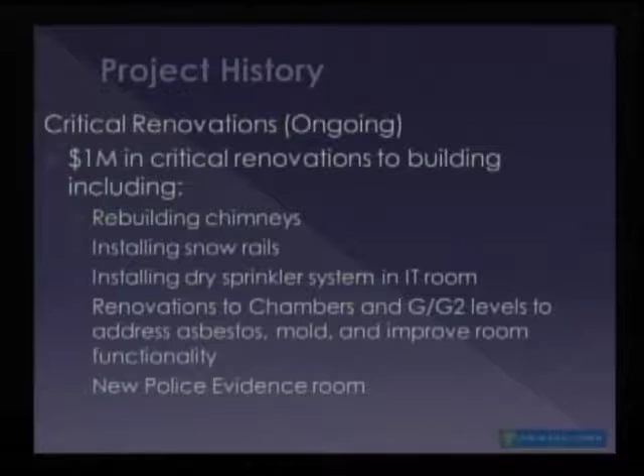We then went into a procurement process to bring an architect on to work on the schematic design, which is what we're reporting on this evening. After an extensive procurement process where we got a lot of great responses, we brought on 2 architectural firms that are doing our large projects for the city.

After they were under contract and approved by City Council, we then asked them specifically to propose how would you address and approach the City Hall Public Space and Safety Improvements Project. Through that process, council awarded to Studio 27, and that was with the full consensus of the City Hall Task Force.

Most of you have heard this presentation before or have had interaction with Studio 27, but I'll just note for you all, they have done business in the city before as they did the design for the Easter Seals building just off of Hillwood.

We have decided that the construction methodology for this project will be called CMAR, which is a construction manager at risk process, and it's a way to mitigate the risk for the city and control costs. What it allows us to do is, per state code, bring on the contractor during the next design stage, and then they would be with us all the way through design to construction, teaming with the architect, so we're all clearly on the same page as we move forward to design and construction.

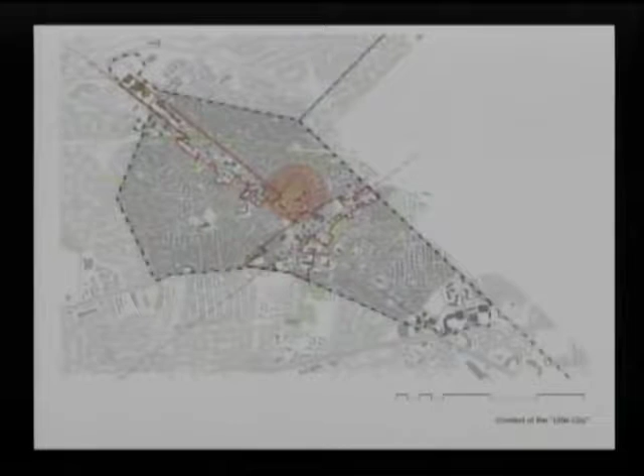So what I'm going to show here is a couple of slides, and the way that we began to study the building. This first slide is drawing the city and then also drawing the building to see what their relationships are, and how it exists right in the center of the town and how meaningful that is to make center.

Then we started zooming in a little bit more, and these are two diagrams that illustrate how the City Hall is really a building in the park. You can see Cherry Hill Park off to the left, and if you understand these topo lines, basically how the ridge rises up, City Hall sits there, and then rests gently against the park.

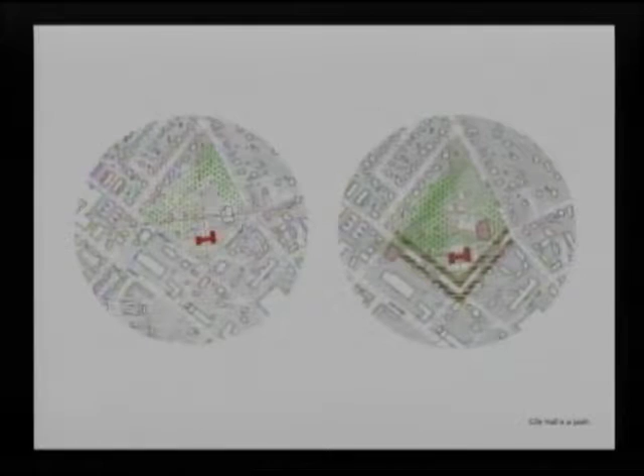When we first got involved was about right here. These are some diagrams that we created, but we were really analyzing exactly where things are. The one on the left-hand side, you can see City Hall in the very front, and then off to the right is the community center.

There's an axis that actually begins to be formed between the intersection at the library and the rec center. It's interesting the way it begins to cross the landscape and connect the whole urban campus, this municipal campus that's formed.

Then we look to the one on the right, and that's the concept that we actually received with Report 4. Report 4 was done by Dewberry, and they had, as Cindy was explaining, gone through so many gyrations of what this building could be, and ultimately this was imagined to be the right sizing of the building.

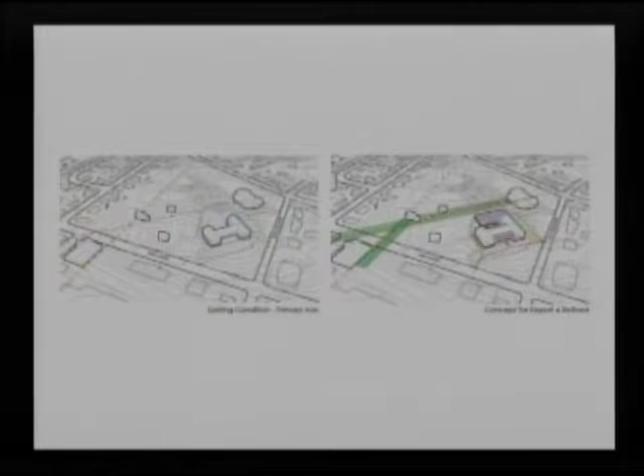That encompassed an addition at the front, we call the south building, or the south addition. We have the north addition at the rear, and then there was a parking garage. So those three elements become the primary elements that begin to be connected to the City Hall.

And then the next thing that we did was start drawing, as architects do. We actually found that there were no drawings of note that captured all of City Hall. So what we did was we collected from a whole range of different sets of drawings and documents that we could find.

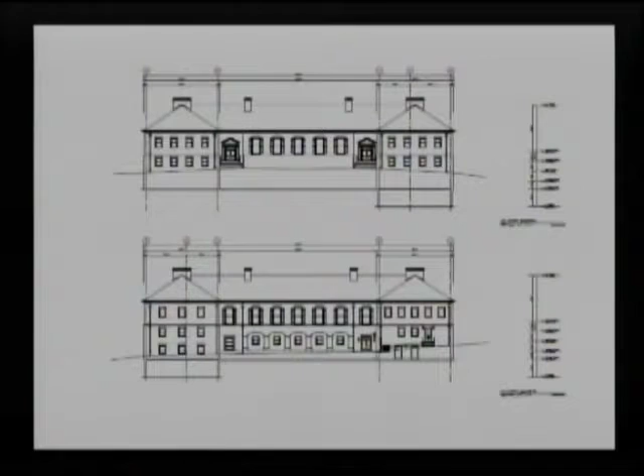And then you go through this process of drawing. That method actually begins to ingrain what this building is like, what it is, what it was, and what the original architects were thinking when they drew it. And so that process is very meditative, but it's also educational.

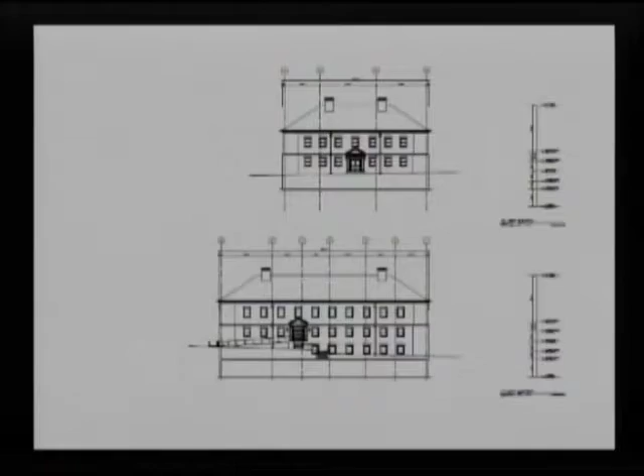And so as Jason was drawing through these and I was drawing through these, we were learning: what is the rhythm of the building? What is the scale of the building? And how does that begin to be reflected in what was realized?

But you can see how with the original building, the 1956, and then ultimately the 1980s addition, it was placed on the hillside very, very much with intention. It's also simple and balanced, humble in a lot of ways.

So we kind of joke about this. It's a studio because I'm educated at UVA, and it's like, when you start going and looking at a building, okay, well you got to draw a circle on it, like the rotunda. But really, this is a way that we began to understand the vocabulary of the building, the rhythm, the repetition that you find, the scales, all of this meaningful geometry that's embedded into a building.

And in a way, you're also going back and sort of reflecting through what the original architect thought about. So this is our next sort of way of imagining how this building was imagined and conceived.

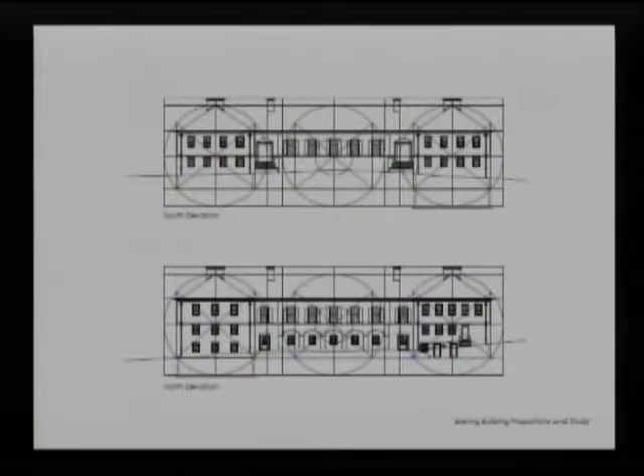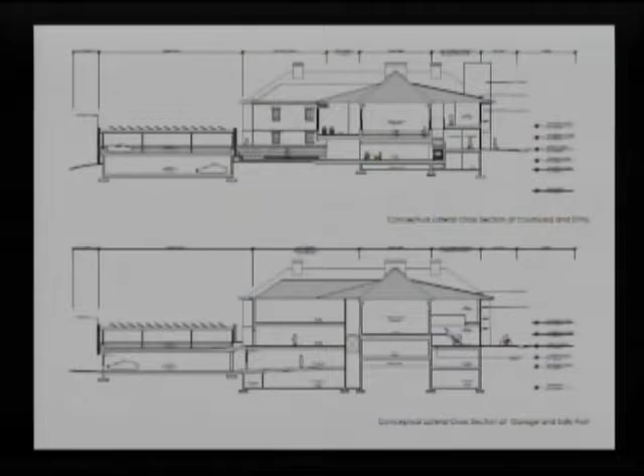So that's what this section begins to see: if we began to put X program on this part of the floor, what do we put on the next portion of the floor? And then we realized that there were a lot of common adjacencies, and if we began to interweave those together, the spaces open up and really have a very obvious relationship to one another.

A key component that we have in the building is wayfinding. Currently, when you come in, I would dare say, if you could guide someone to the bathroom on the first floor on the east wing, it's not going to happen. So one of the critical things that we were trying to figure out is what's going to lead most elegantly to a system of wayfinding in the building.

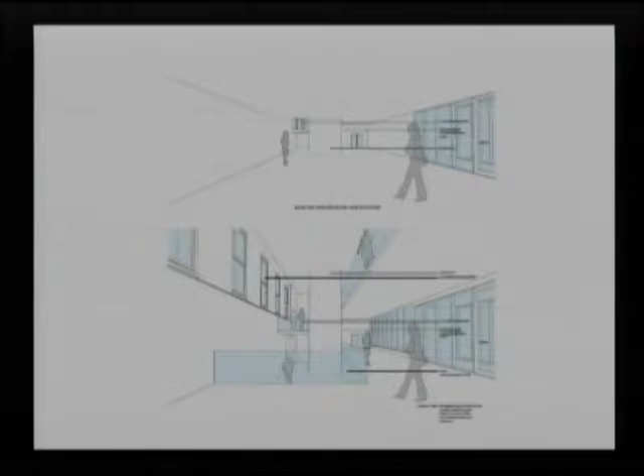So then we said, well, let's open up the floor just slightly so that we can make a visual connection from when you walk in the front door, off to the right here, to where the courts would be. You can see the windows of the existing courtrooms now sort of appearing if we cut away the floor. We said, let's take that a little bit further, let's take out the next level of the floor, the one going down. So now what you see is the main entrance on the right-hand side, and we could just add the small stairway here, and on the left-hand side, this is where the dogwood room is.

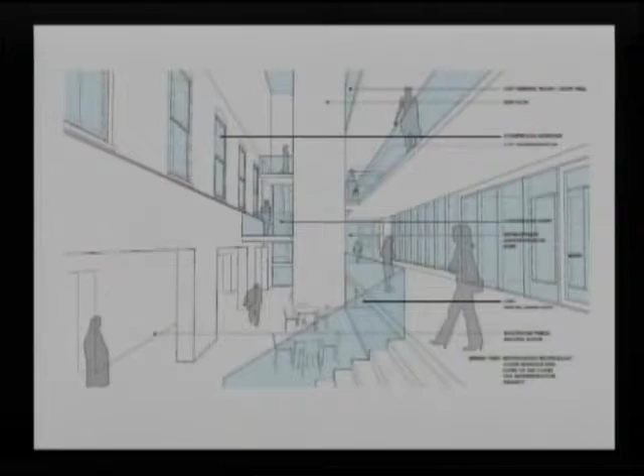Above that is the chambers where we sit now, and then off to the end begin the public exchange counters between the different program elements we have in City Hall. So we're going to reconfigure the wings, I'll show you a plan in a moment, so that the public functions would be immediately off of this new public entryway.

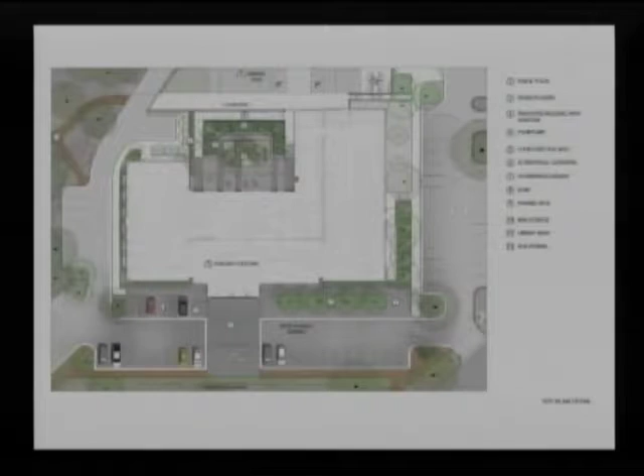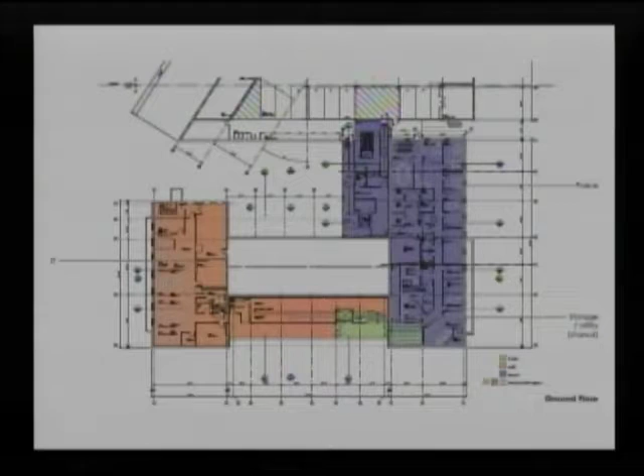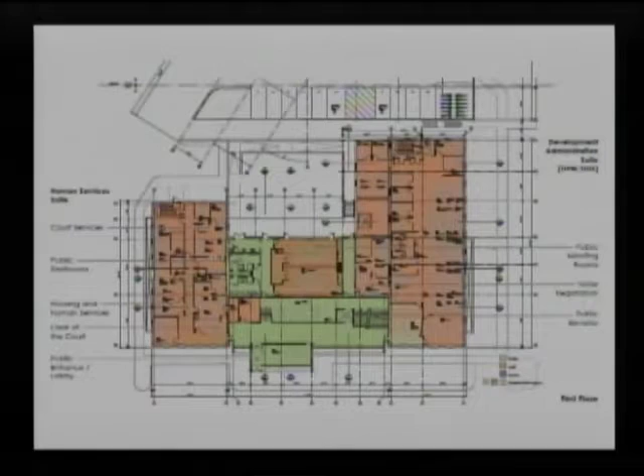So now we start, what does it begin to look like? We'll go back to my trusty UVA drawing and start looking at proportions, rhythms, and repetitions, trying to be very respectful of the original building.

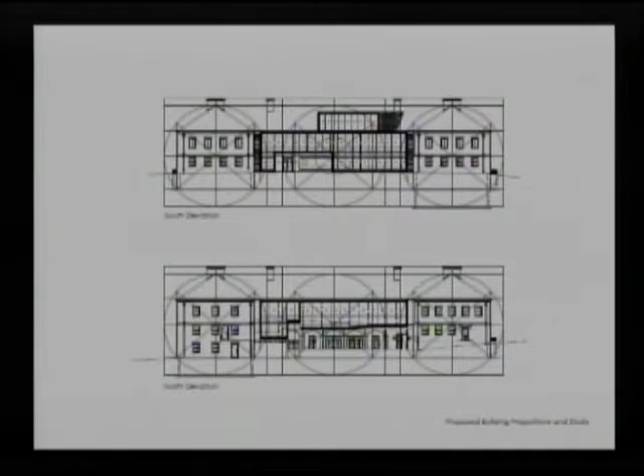What we have is we've created a glass box which is transparent so one can appreciate the original structure. In that glass box, it's also framed and very delicately touches the original building. We're trying to create a building that is transparent and has a delicate relationship to the existing structure.

This is a detailed study we've begun, with a lot more development to do, but basically the original structure, the red brick on the right-hand side, and its rhythm of windows, drip course, and eave line, are all translated into the framed and subtle divisions of all the glass of the new structure.

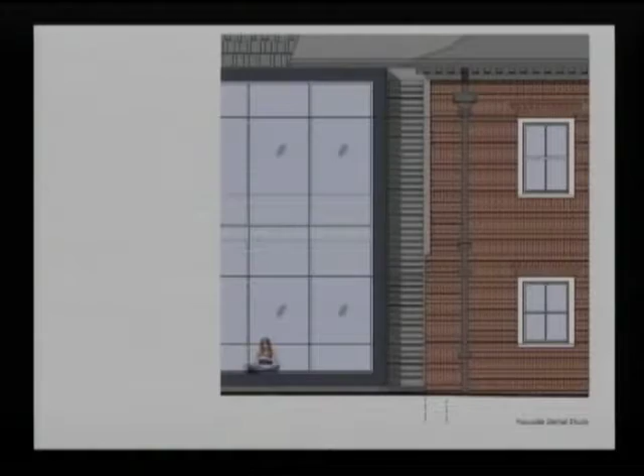So these are a couple of elevations. They're a little bit difficult to read, so I'm going to move through them.

This is a rendering we've been working on to try to study what it's going to look like. Since this rendering, we've now taken off this upper level floor, which was at one time a courtroom, and we'll see that in the video in a few moments.

On the left-hand side, we have the flags, and then the public crosswalk, a high textured crosswalk so that when you drive over it you're very conscious of it. You go into the main entrance, which you can bypass on the left-hand side, and that goes straight down the stairs through to the courtyard, through the lower level of the chambers.

To the right-hand side, we have a large atrium area with a new elevator, new stairs going up each floor, and public counters occurring at the end of each of these corridors.

This is another view looking into different kinds of materials, and we're going to continue these material studies through the design development phase. This is schematic, so we're really just thinking conceptually about what the building should be like and how it should relate to the original structure. This was looking at a Corten steel or a wood-skinned building.

I should note the building will be silver LEED certified, with a high sustainability component across site sustainability, water, energy, and environment. This building will save a lot of electrical and utility cost, especially based on the analysis we've done of the existing structure.

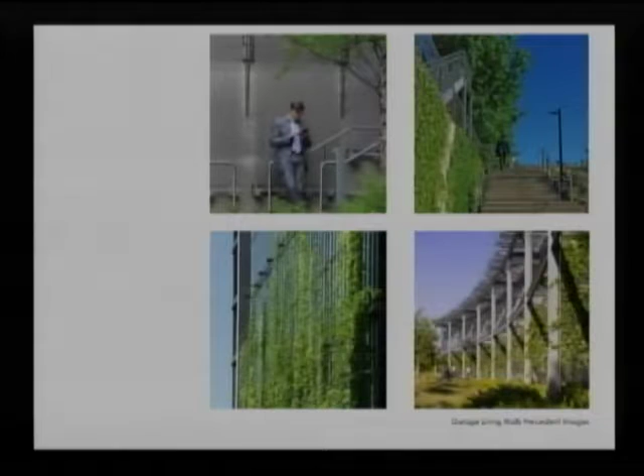That's what we were working with for the exterior surface materials of the parking garage currently, because we really want it to feel like a piece of the landscape, evolving out of the park rather than an addition to the building. Each time we refer to it, we say the garage is actually an extension of the park, and that's proved true in many different ways.

One thing we were able to determine is that if you study the site topography, the shape of the land, the high point is about 12 to 13 feet above the low point of where we're putting the parking garage.

So what does that do? That allows us to separate any internal circulation of the parking garage. We can drive into one section of the parking lot, and at the lower end drive into the other section, and neither needs to meet. That's excellent because it separates all of our public traffic from our security traffic.

And then we started drawing these perspectives to study a little bit. A big component is that we wanted to reduce the scale of the parking garage, to make it feel like part of the land versus a large structure in the landscape.

This is a view from the path we're proposing to connect the parking to the library. On the right-hand side is City Hall, and on the left is where the parking structure is. Beyond that red line is the community center, which will be taller than the parking garage.

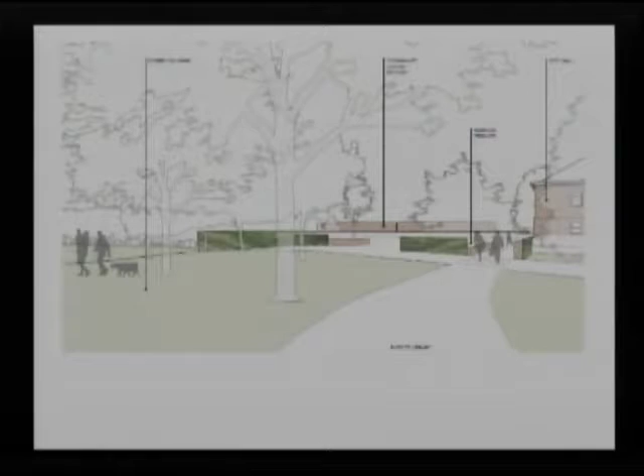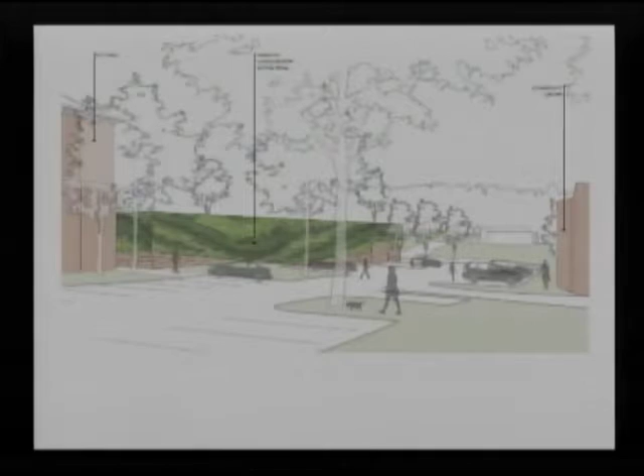This is a view from the far east corner. City Hall is on the left-hand side. You can see how the parking garage would flow out as the land begins to fall away. On the far right is the police cruiser in the rendering, marking the entrance for the secure portions of the parking garage. The right-hand side is the community center.

When we show you the rendering in a few moments, it's a fly-through, so you'll begin to experience and understand how it actually looks from different perspectives.

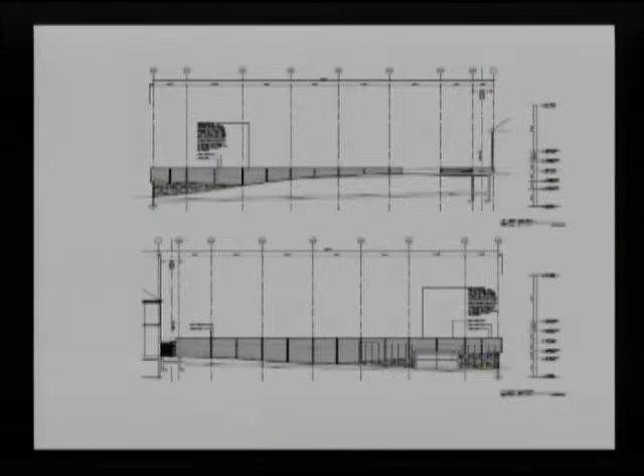Just to give you a sense of how low-lying this is, here's an elevation drawing. On the left-hand side is City Hall, and you can see we're only halfway up, or three-quarters of the way up, the first level of City Hall. So we're keeping it a very low profile.

Overhead view, quick landscape view.

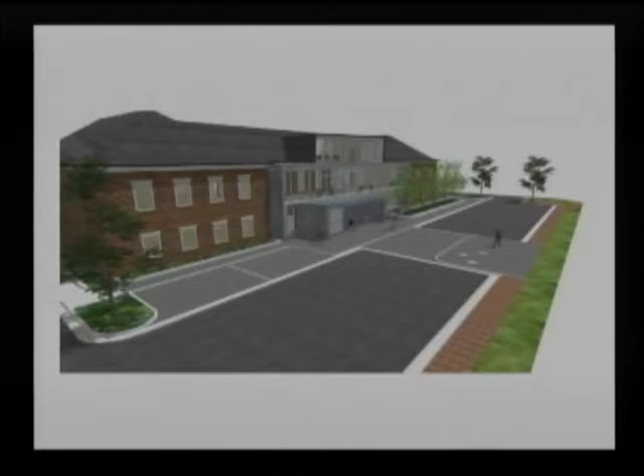So what we're going to show now is the video produced by FCC TV, using a lot of the slides you saw and what Jason put together, creating a fly-through. You'll get a sense of how you work around City Hall. Hopefully this will all work since we didn't get a dry run.

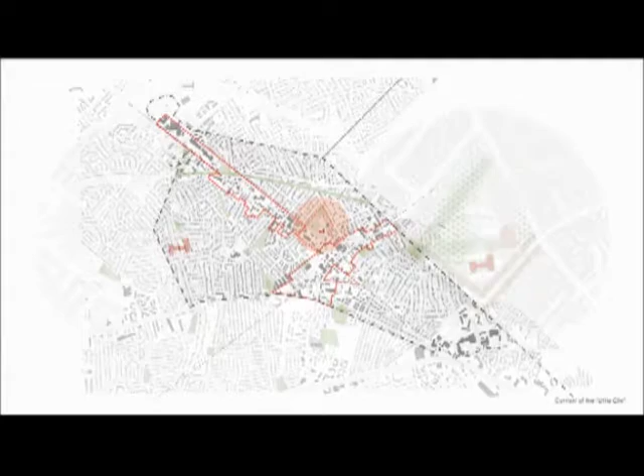City Hall, located in the heart of the little city of Falls Church at 300 Park Avenue, serves a number of functions for the community. In addition to administrative offices for the city government, it also holds council chambers, the combined district court, the police department, the sheriff's office, and more. In this analysis, the architects demonstrate how campus functions could connect for improved pedestrian accessibility and highlight City Hall.

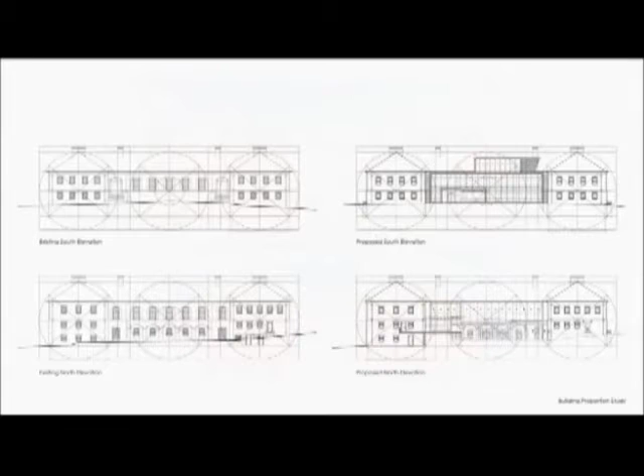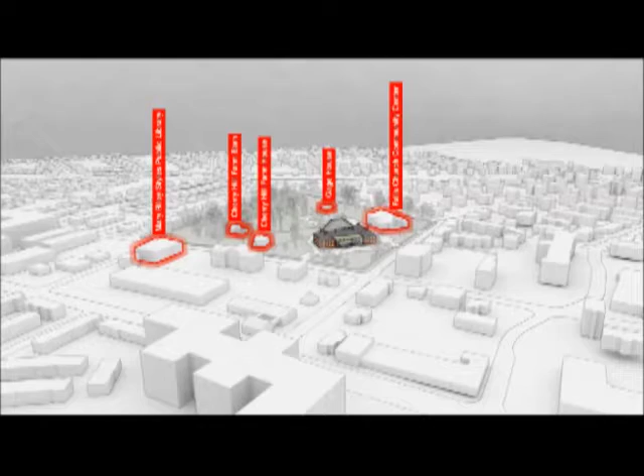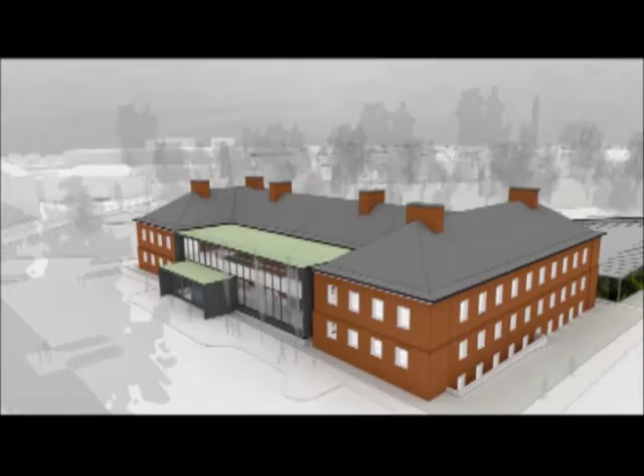You have arrived from the intersection of Park Avenue and Little Falls Street at the planned central front entrance of the Harry E. Wells Municipal Building. The red tags identify the central front entrance, public elevator, and the courtroom chambers entrance. You are now moving around the exterior of the east wing with a view of the two-level parking garage, which follows the ground elevation to keep a low profile and blend into the park. A living wall that changes colors through the seasons is planned.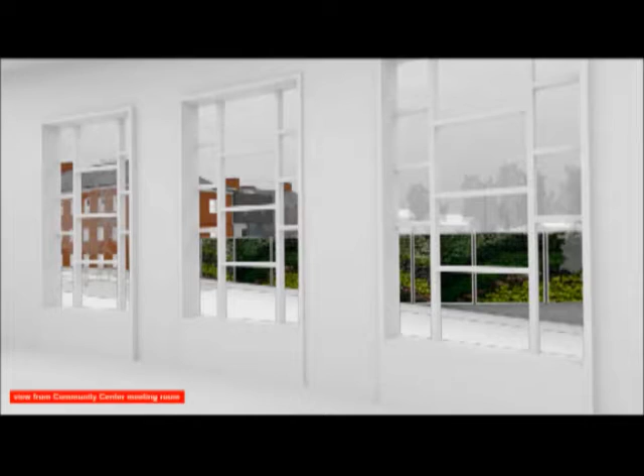This perspective is from the inside of the community center, looking toward the planned parking garage and City Hall expansion. This is a 2-level parking garage in the rear of City Hall.

The lower level will be for police, sheriffs, and courts. It will be completely enclosed and secured. The top level will have approximately 44 spaces, which will provide additional parking to the City Hall campus and reduce demands on surrounding parking areas.

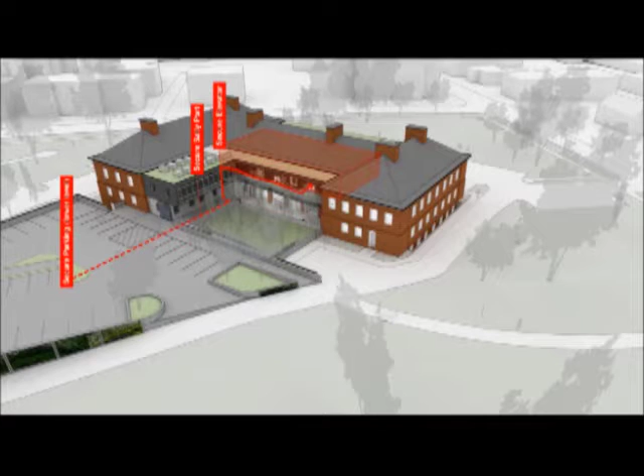There will be an enclosed sally port and an addition to the rear of City Hall, which will include a new security access elevator and security corridor for court. This design will connect the east and west wings and add office space for city staff. City services can then become available to a greater number of city residents.

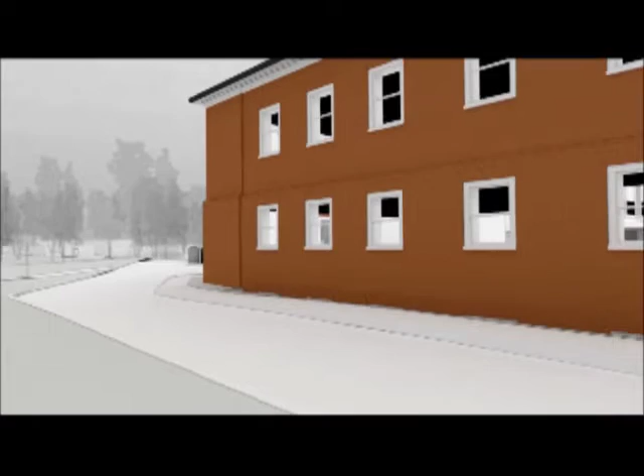The final component of the project will be modifications to the existing building, including a complete renovation of the aging HVAC system, as well as interior renovations to maximize existing spaces and improve connections to the new building additions.

We are now traveling beside the west wing, back to the front of the building. Moving into the main entrance, a centralized elevator allows for easy and convenient access for people of all ages and abilities. Visitors to the building will easily find the public meeting rooms down a half level upon entering.

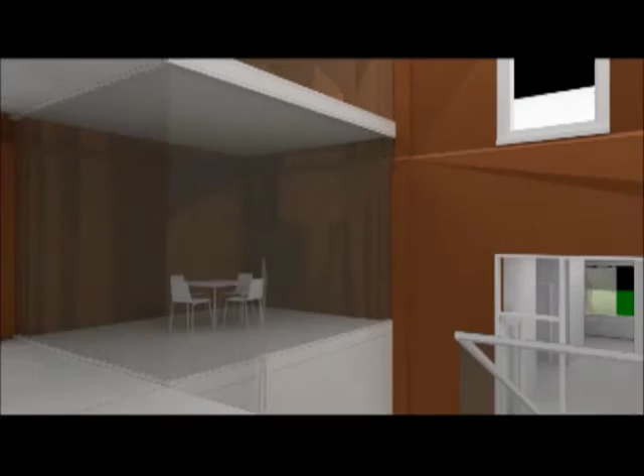Looking left and right, they will find department services such as the permits counter, parking ticket payment, voter registration, and employment information. The new central entrance to City Hall is an important component of the renovations.

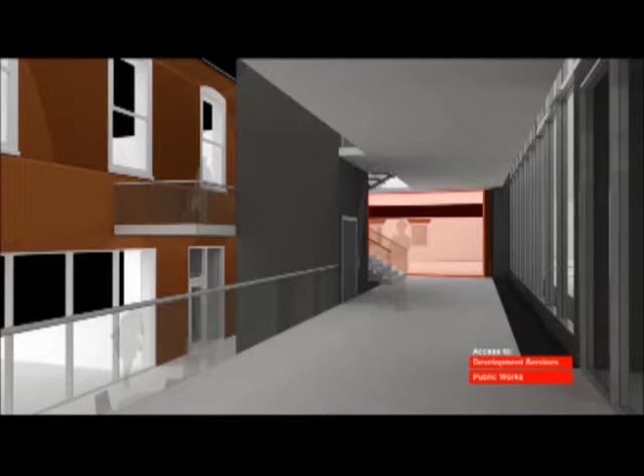The city's most used services will be brought to the front, and public meeting spaces will be conveniently accessible. The building will also be more secure, allowing for only one visitor entry point. The corridor connecting the east and west wings can be reached by stairs or elevator.

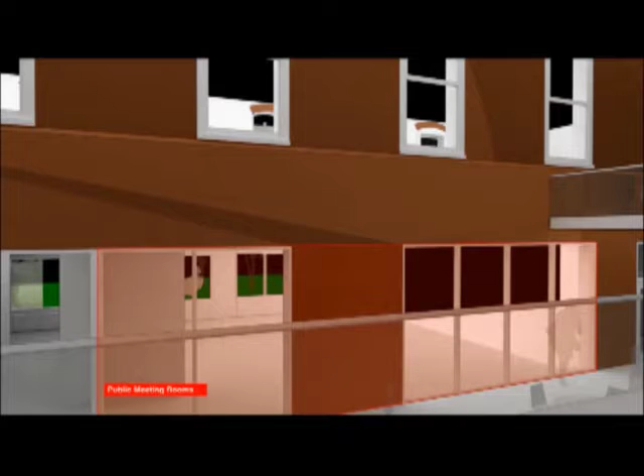You are now traveling to the lower G level and the meeting rooms. The G level will contain 2 meeting rooms and public restrooms in the front part of the building, and it will be near secured areas of police dispatch for after-hour reporting.

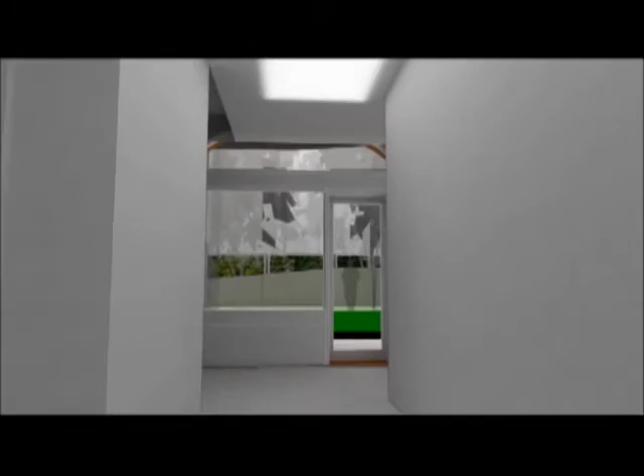Moving past the public meeting rooms, you will arrive at the outdoor courtyard. That completes the video tour of the planned City Hall public space and safety improvements on the City Hall campus.

Staff will continue to finalize floor plan and elevation concepts and other details. Public input will be solicited as the exterior architecture and designs are refined. Pending council concurrence in November, we anticipate construction to begin late 2017 and be completed by late 2019.

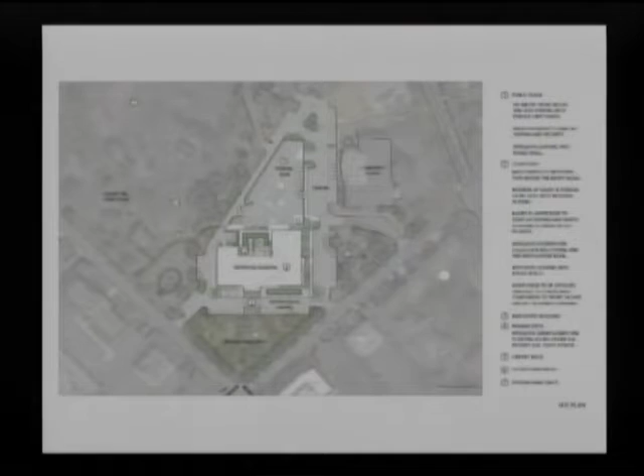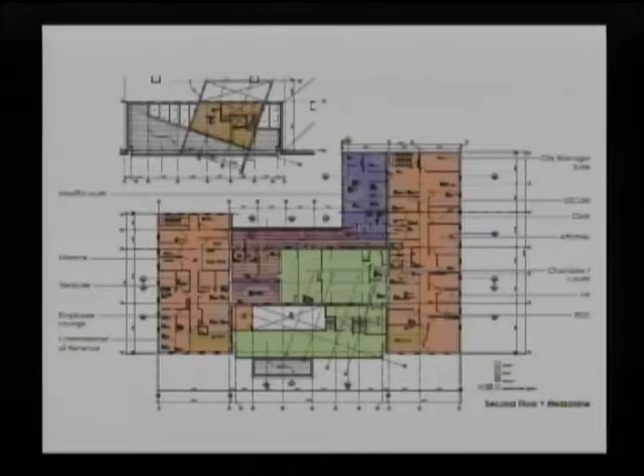So we have a lot of foot traffic, and a lot of elderly foot traffic. I'm not so sure us going to the second floor is a good idea. If you've seen my waist, it's probably good that I use more stairs, but I'm not sure about the rest of the people. Just a thought. It is hard to juggle who's on what floor, but if public safety is the first goal, and the second goal should be benefiting the public, that should make the building most efficient for them. Employing a certain department's wishes kind of comes further down the line, if you ask me. It's a very good point.

Have you more or less eliminated that pop-up to the right of the top of the roof? Up the top, yes, that's gone. It sets the whole building askew. Your circles won't go around it. No it won't -- no matter how large we drew those circles, they didn't work. Totally off-center.

But that's the value of public input, because we showed the different renditions and got a lot of feedback.

Let me add to Ms. Hockenberry's question before about meeting space. In addition to the public meeting spaces that Todd was mentioning, in each of the office floor suites we have conference rooms so that we have staff meetings, developer meetings, or contractor meetings. So there's additional space for that function, but a good amount of public space in a nice central, safe, secure area for the more public meetings of boards and commissions.